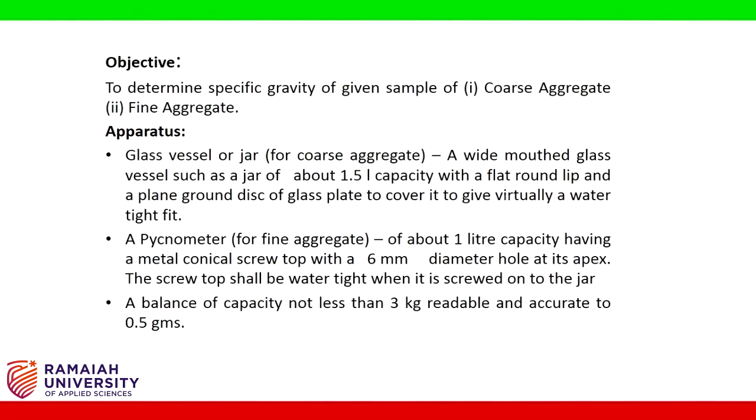Specific gravity of a material may be defined as the ratio of weight of known volume of the material to the weight of equal volume of water, both weights being measured at the same standard temperature. This standard temperature is 4 degrees Celsius.

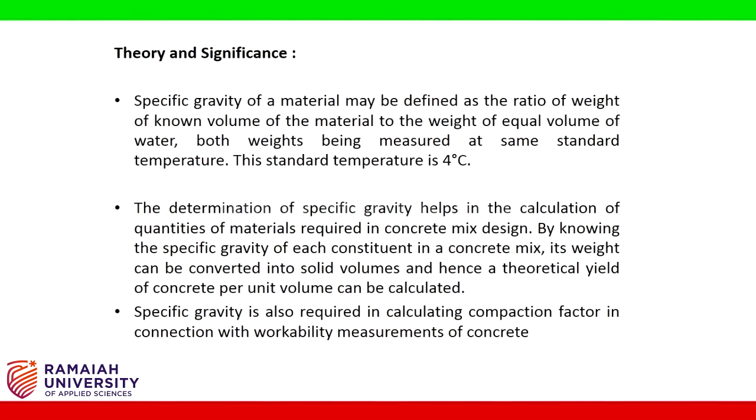The determination of specific gravity helps in the calculation of quantities of materials required in concrete mix design. By knowing the specific gravity of each constituent in a concrete mix, its weight can be converted into solid volumes and hence a theoretical yield of concrete per unit volume can be calculated. Specific gravity is also required in calculating compaction factor in connection with workability measurements of concrete.

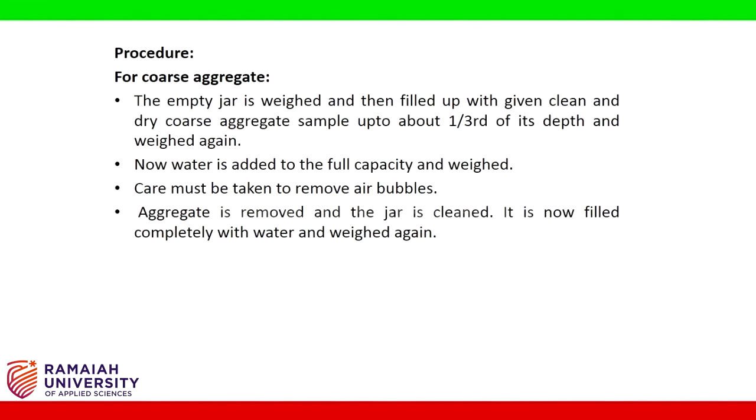Procedure: for coarse aggregate, the empty jar is weighed and then filled up with clean and dry coarse aggregate sample up to about 1/3 of its depth and weighed again. Now water is added to the full capacity and weighed. Care must be taken to remove air bubbles. The aggregate is removed and the jar is cleaned. It is now filled completely with water and weighed again.

Fine aggregate, that is sand. The empty weight of the pycnometer with conical top is taken. It is then filled up to about 1/3 of its depth with the given sand, which must be clean and dry, and weighed again. Water is added to this fully and weighed again. Aggregate is removed and the pycnometer is cleaned. Now the pycnometer is filled completely with water and weighed again.

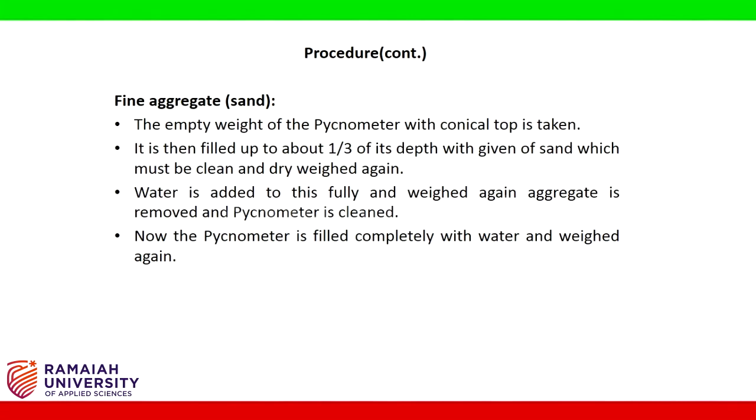Calculations and observations. Coarse aggregate. Weight of empty vessel W1 in grams. Weight of vessel plus 1/3 of coarse aggregate W2 in grams. Weight of vessel plus 1/3 of coarse aggregate plus water W3 in grams. Weight of vessel plus water W4 in grams. And specific gravity is calculated by the formula shown.

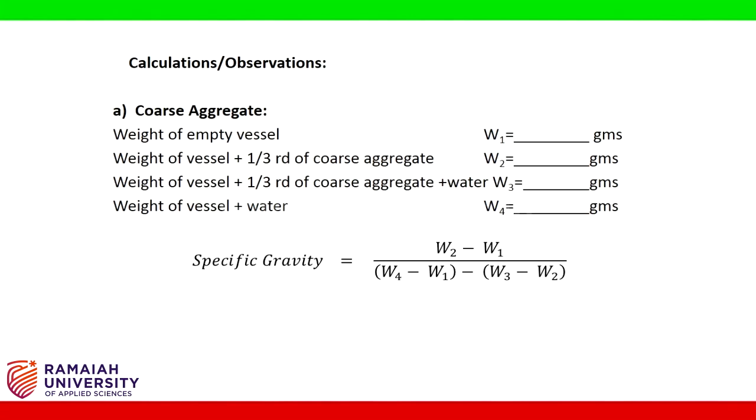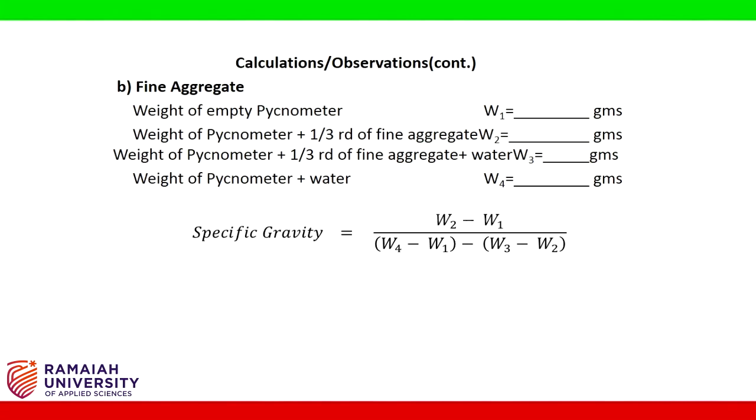Fine aggregate. Weight of empty pycnometer W1 in grams. Weight of pycnometer plus 1/3 of fine aggregate W2 in grams. Weight of pycnometer plus 1/3 of fine aggregate plus water W3 in grams. Weight of pycnometer plus water W4 in grams. And specific gravity is calculated by the formula.

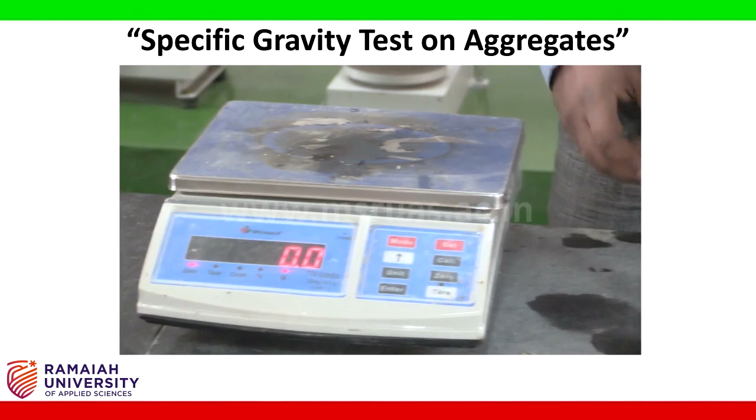Hi students, now we are doing the specific gravity of fine aggregates. So what do you mean by specific gravity? It is defined as a ratio of weight of any material to the weight of equal volume of the standard material. The apparatus required for this experiment is the electronic weight balance of 0.5 gram accuracy and a pycnometer. Generally this pycnometer is used to determine the specific gravity of finer material.

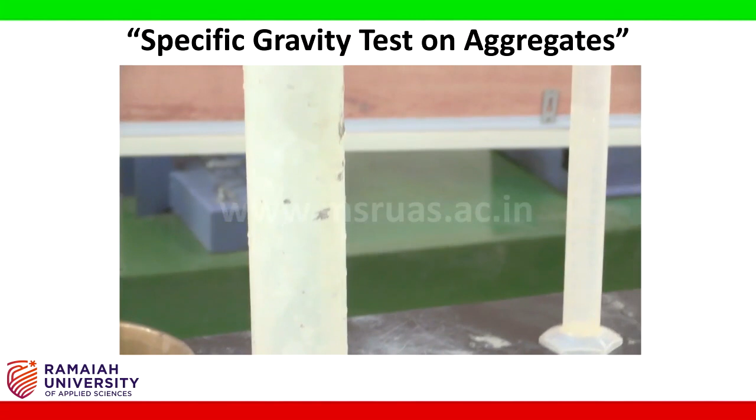This pycnometer has 3 parts: a brass conical shape along with the rubber seal, a jar and a collar cap. Next, I have taken some quantity of sand and water. Let's start doing the experiment.

First I am going to take the empty weight of the dry pycnometer. This has to be oven dried. I have taken the empty weight of the pycnometer. This weight I am going to note as W1 grams. After this, I am going to add a 1/3 layer of fine aggregate.

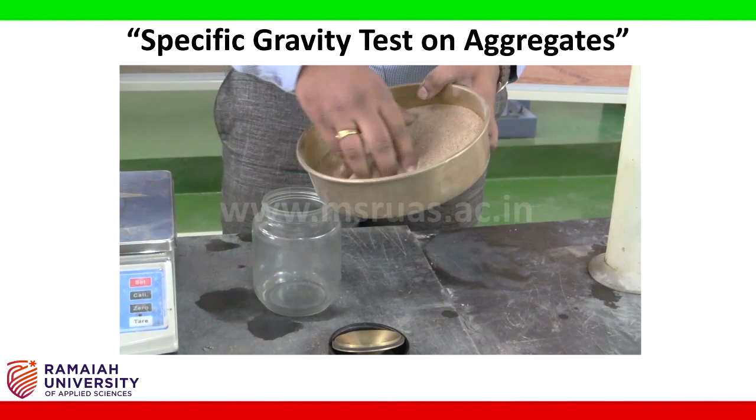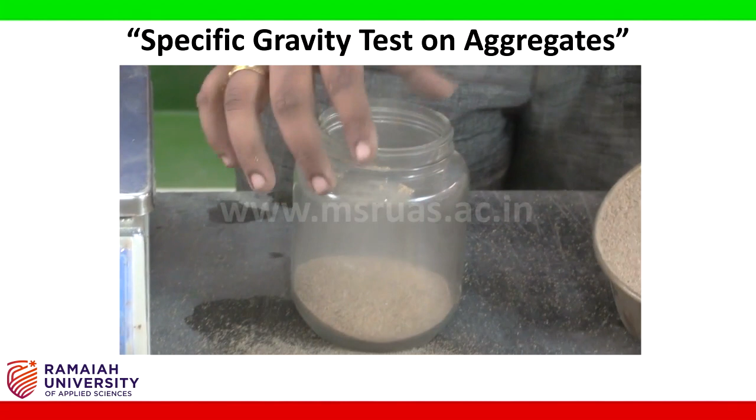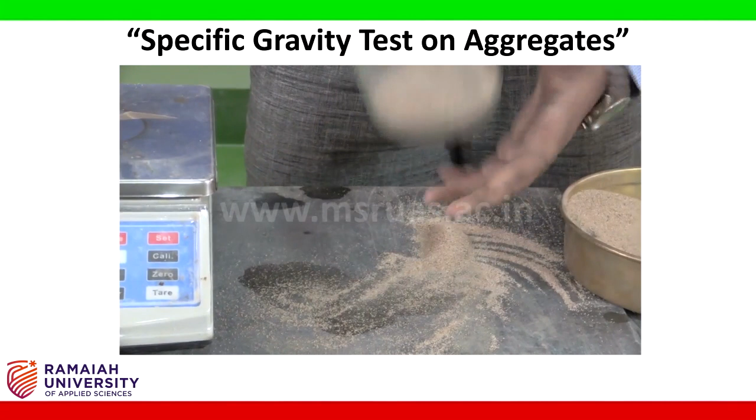Approximately 1/3 will be added. So I have taken 1/3 of the sand. I am going to fix the collar and the cap back, and I am going to take W2, that is the weight of pycnometer plus the sand particles. Next I am going to completely fill this with water.

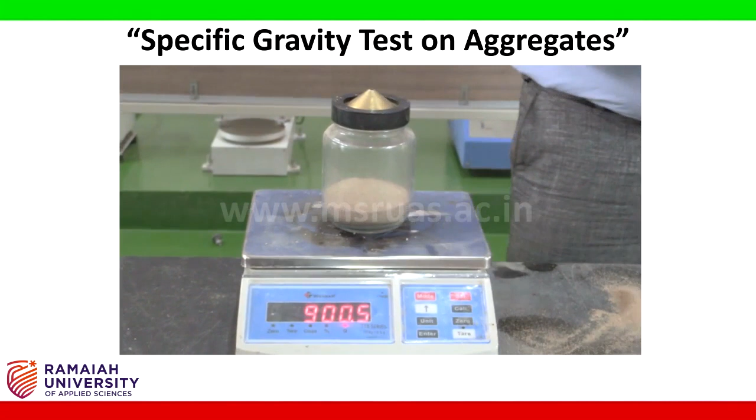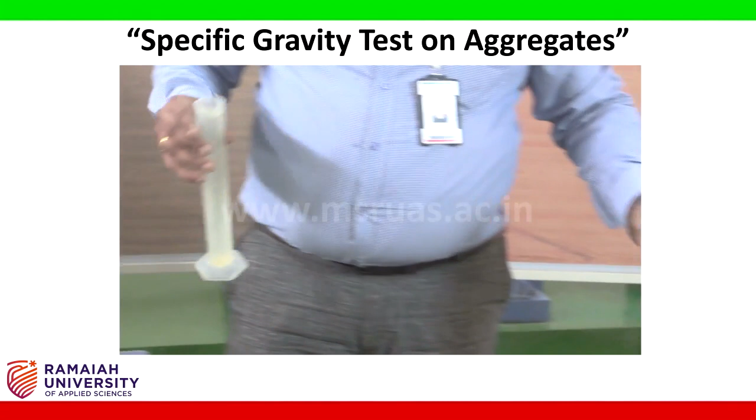So we'll remove the top portion only, with a measuring cylinder. First, I'm going to completely fill the remaining portion with water.

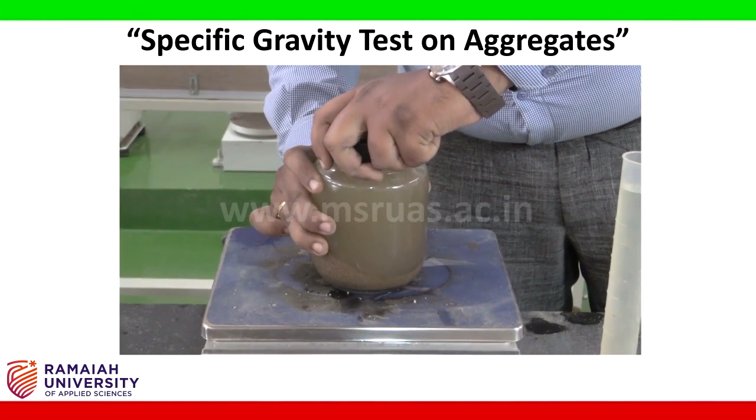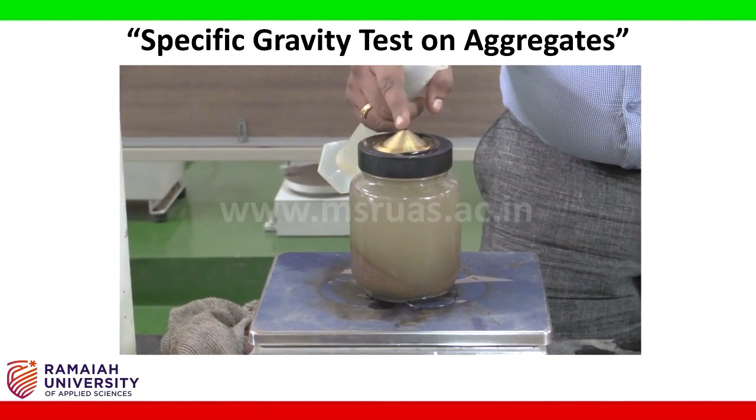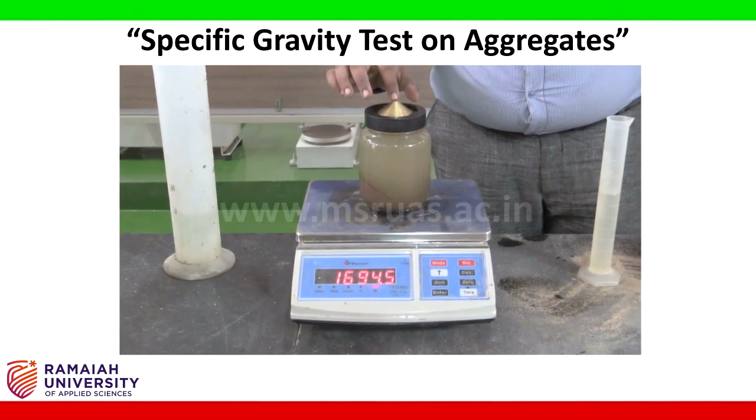I'm going to fill up the conical portion with water, making sure that this conical flask is completely filled with water. I'll remove the excess water which is outside. After filling the tip completely with water, I'm going to note down W3.

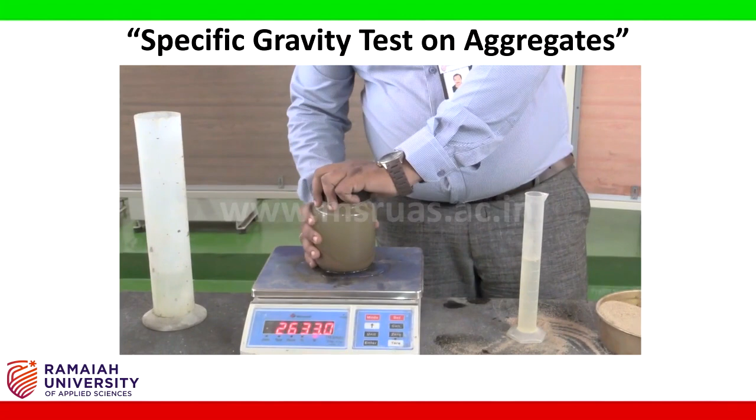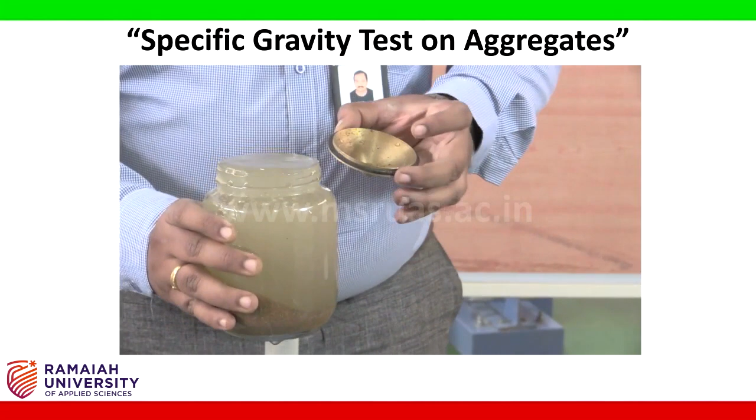Next, I'm going to throw away the contents from the W3 weighing. I'm going to take the completely empty bottle, fill it with water, and once again take the weight. After W3, we are going to fill this complete container with water.

Fix the collar and the cone cap. Completely fill the remaining portion with water. Okay, take down the W4 weight.

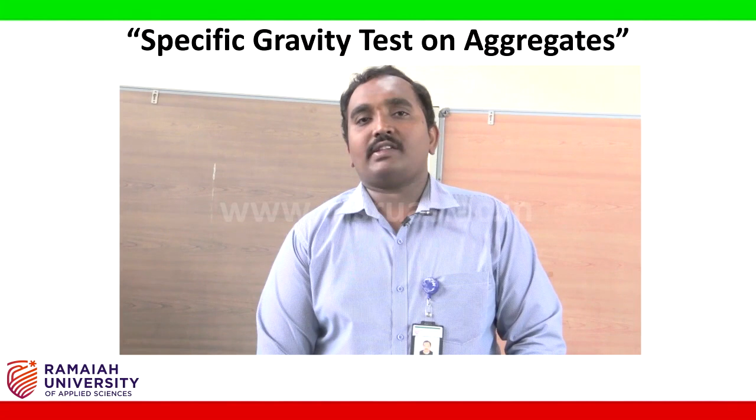By having these 4 weights, we can easily calculate the specific gravity of the fine aggregates. Generally it lies somewhere between 2.5 and 2.6. It depends upon the source of the fine aggregate. This completes the specific gravity of fine aggregates.